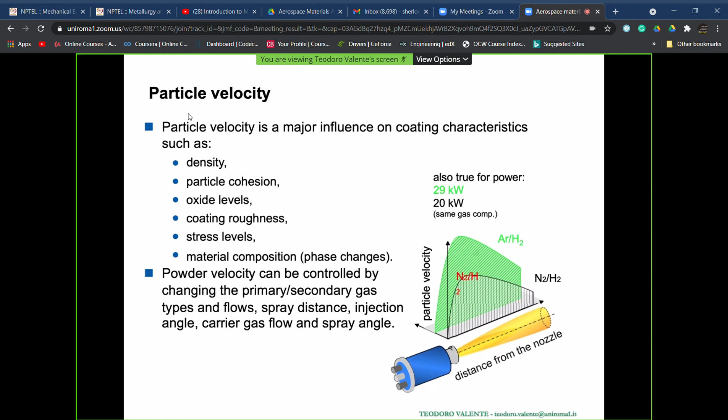The powder velocity can be controlled, as a guideline, by changing the mixture between primary and secondary plasma gas, the flow of this gas, the spray distance, the injection angle, and the carrier gas flow, as well as the spray angle. All these parameters have an influence on the particle velocity.

So to make a small summary of the spray parameter influences on coating qualities: primary gas, and for primary as well as secondary, we are going to identify plasma gases. Primary gas is very important for gas and particle velocity.

If we increase the gas flow, we increase the particle velocity, so we have faster particles, and together this leads to a reduced travel time through the plasma, meaning less heat is seen by the particles. So it must be properly balanced in order to have the desired degree of melting of the particles which are going to be sprayed.

Fast plasma also becomes harder to be penetrated by the particles through the injection mechanisms. And if this happens, it means that fewer particles are injected into the hot area, that is the plume.

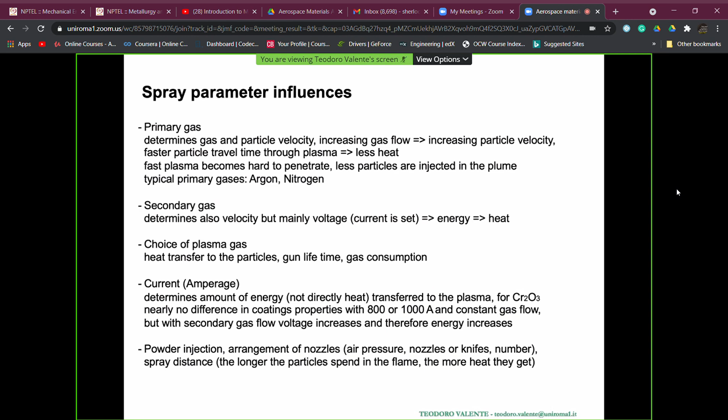As we have already said, the longer the particles spend inside the plume, inside the flame, the more heat they get. So the highest degree of melting can be obtained without exceeding into evaporation phenomena, which can change the coating composition, as it affects low melting elements first.

For the primary gas, nitrogen is the cheapest plasma gas, and it is widely used because it is inert, meaning it is not able to give rise to chemical reactions with most spraying materials.

One material which cannot be sprayed with nitrogen is titanium, because titanium has a high affinity with nitrogen, and after recombination in the plume there could be a reaction between titanium and nitrogen to form nitrides. This means if we want to fabricate titanium-based coatings, the use of nitrogen is not suitable, because we would incorporate nitrides into the coatings, which differ in composition, mechanical properties, and chemical-physical properties with respect to the starting titanium.

But this opens another window. This is one example of the plasma spray technology which has been used, because if we use, for example, titanium with nitrogen, we can expect to have a subclass of plasma spray technology called RPS technique, that is reactive plasma spray. In this case, we want the reaction, and so we want the incorporation of nitrides inside the coatings. If this is desired by the designer, we can think to use nitrogen.

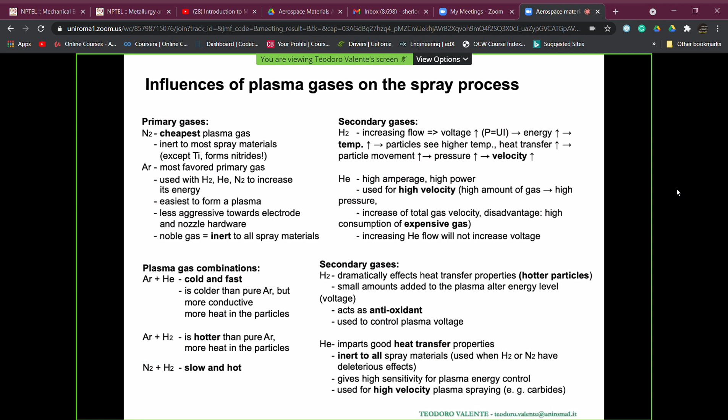The carrier gas flow is important because it can affect the way in which the powder is introduced into the plasma plume. If the carrier gas flow is too low, the powder will not enter the plasma flame, resulting in poor powder melting. If the carrier gas flow is too high, we can have a phenomenon called overshooting.

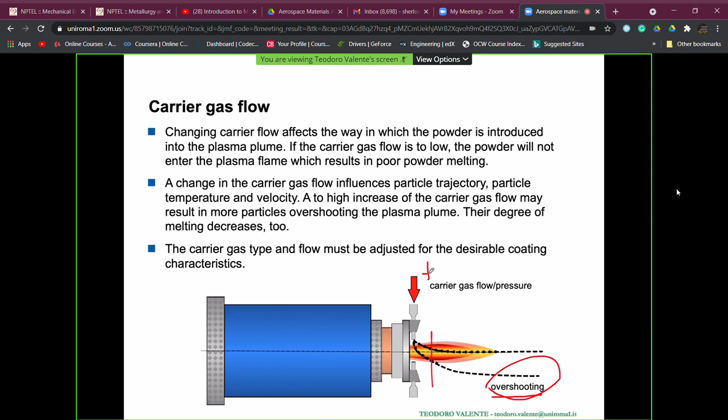That is, particles can travel across without experiencing good melting behavior, giving rise, for example, to unmelted particles incorporated into the coatings, or dust inside the spraying chamber. So this parameter must be set, typically by pre-experimental tests, depending on the substrate to be coated and the material fed as powder, in terms of composition and average size.

If we move to the possibility of having this plasma process in a confined environment, that is, in a chamber like those reported in this slide, we can open two categories of processes. One we have already defined: the so-called vacuum plasma spraying, which can also exist in the variant low pressure plasma spraying or low vacuum plasma spraying, which consists of spraying inside.

You see, this is the robot—this orange part is the robot. At the end of the robot here, the gun is mounted, which performs the VPS or its variant, spraying in near vacuum or under reduced pressure conditions.

In this case, as we have said before, we are going to reduce the frictional force of the atmosphere because we are going to a lower value of pressure, so the plasma plume will be longer. This means also that we can have higher residence times of the particles inside the plume, and we need higher spray distance.

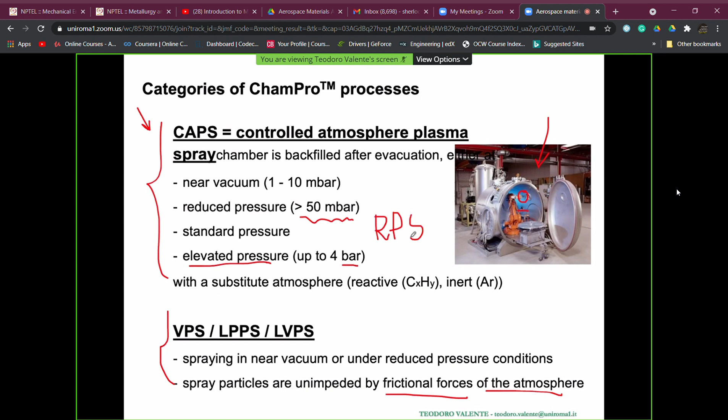The vacuum plasma spray process has some advantages with respect to the standard air plasma spray process, but obviously is more costly because we need a chamber, we need all the pumping unit, we need all the pressure controls. Then we could be limited in terms of size of the component to be coated by the chamber dimensions.

But anyway, one of the most important advantages among those listed here - some are also disadvantages - is the possibility to have a slow coating solidification due to being in vacuum, reduced heat transfer after impact of the particles on the substrate. This is beneficial in order to reduce and better control the residual stresses on the fabricated coatings, which in some cases is the basic mechanism on which, under working conditions, coatings can undergo failure.

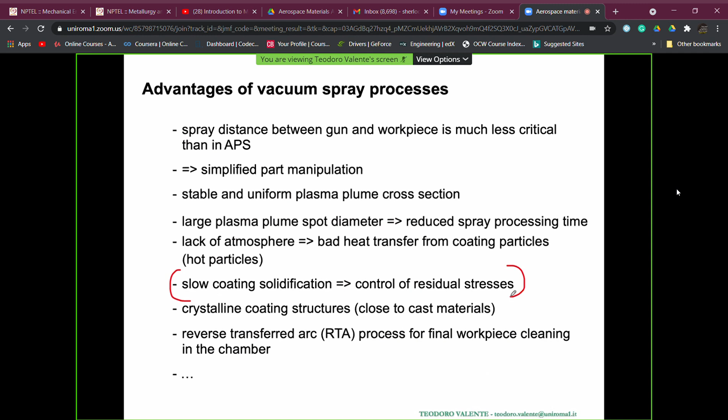Here I have reported just for you, these are industrial slides, some of the configurations which exist for the vacuum spray processes. The only thing I want to say to you is that this type of gun is the Sulzer Metco gun that we have seen at the beginning. So we can have different configurations.

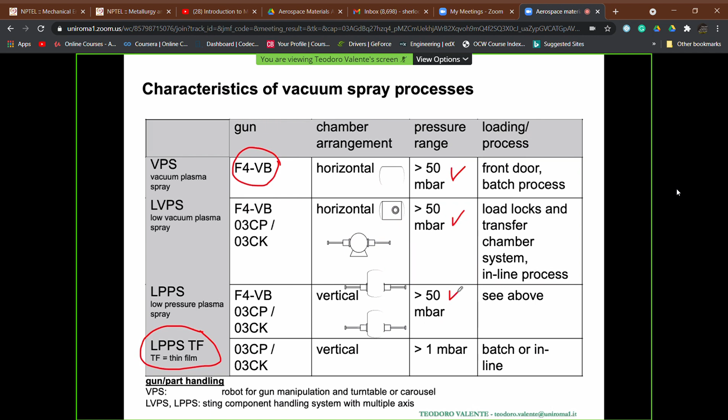But if you see, apart from the last process, which was developed essentially in research and development activities, it has not received real industrial attention for real component fabrication in terms of volume of components which can be considered significant. They are all with a configuration vertical or horizontal and with a pressure range inside the chamber which is near the value of 50 millibar.

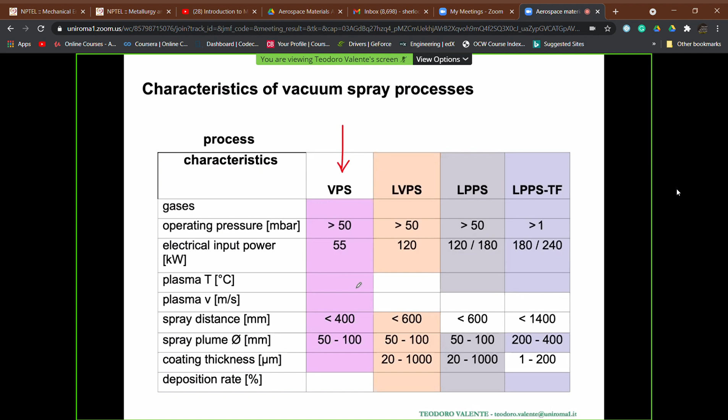We still need to discuss that, but I can anticipate the deposition rates in terms of thickness per unit time for thin films is something around microns per hour. In the case of plasma and vacuum plasma spray processes, we can have deposition rates which are in the range of millimeters for some minutes. So for minutes, I would say, so also the productivity is very different.

Some applications which are, let me say, not related, but just to tell you how these technologies can be used and are used in a widespread area. For household appliances, like this one, you see the powder type which is used is a ceramic one, alumina titania. Here you have the average size of the powders itself, and here you have the most important values of selected processing parameters.

You see here working with a plasma gas mixture, which is argon plus helium. Obviously that's APS, air plasma spraying, because we are spraying oxide materials. Here you see the spray distance, which is around 10 centimeters. These coatings give a specific micro hardness and specific roughness surface properties on the base materials, which could be, for example, steel, in order to have anti-scratching behavior of the appliance itself.

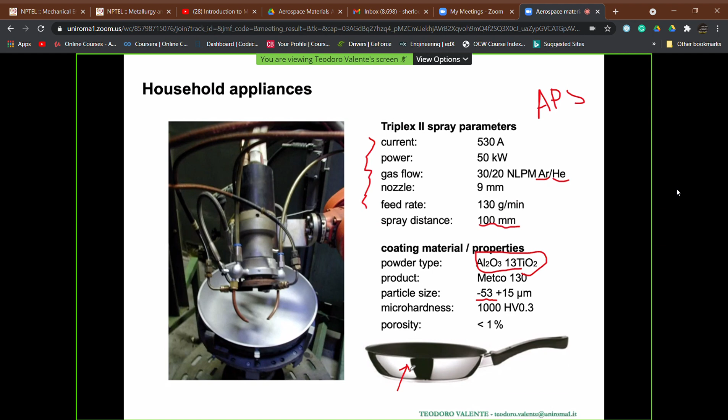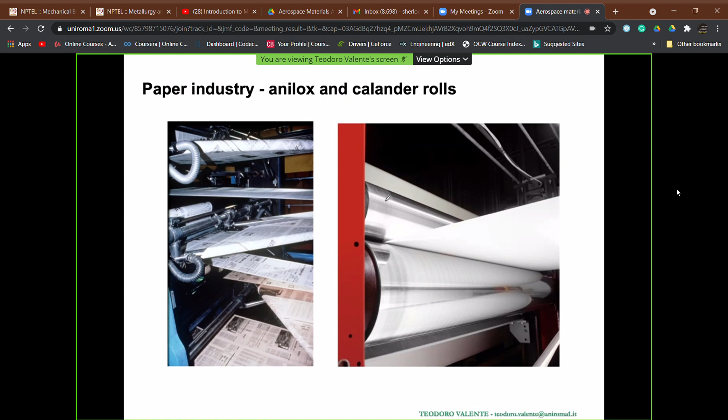Another sector I mentioned in which plasma spraying is used is in the paper industry, on calender rolls, due to the high wear loads that paper is able to put onto the surface with which it comes in contact during the fabrication.

Also for the transfer of ink to printing rolls, there's the possibility to have coatings which are laser engraved, like this one, in which ink can be retained into the special morphology of the coating itself. This is important, as well as the possibility to have wear-resistant surfaces.

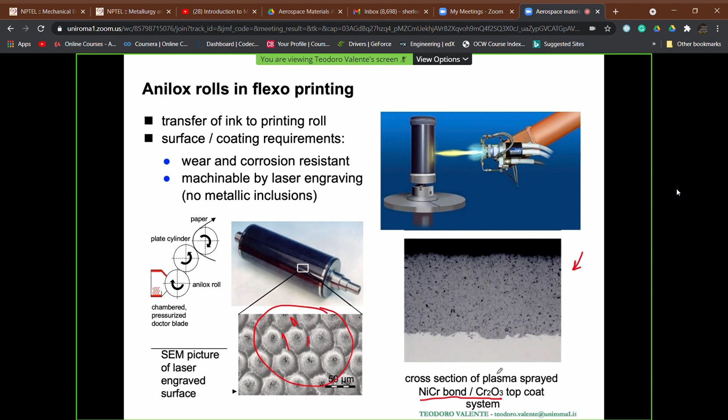That's an example of a coating. In this case, it's a cermet coating in which we have a metallic phase based on nickel and chromium, and a ceramic phase which is not a non-oxide ceramic phase like in standard cermet materials, but is chromium oxide.

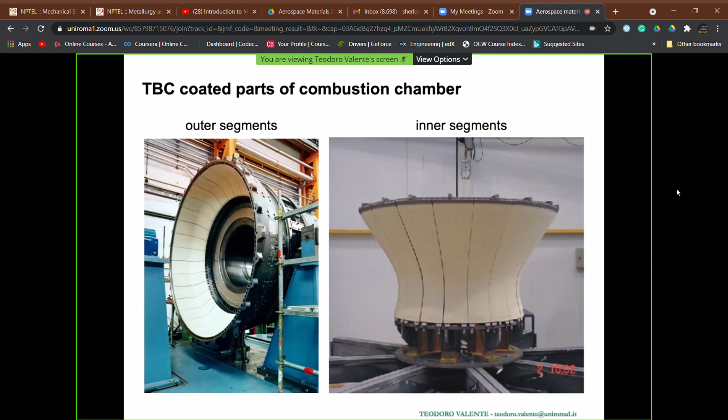And then coatings in gas turbines. We have seen also these pictures, just to remember: combustion chamber, blades. That's an important area of application referring to our field of this kind of technology.

Let's move a little bit now to the most important process, as we defined last time, that we can meet in combustion-based thermal spray technologies, which is named HVOF, that is high velocity oxygen fuel flame spray. So, what is the basic configuration?

In this case, we also have, as in the case of plasma spray, a gun that, depending on the type of technology used, can be a little bit longer than the torch - this is the real name of the gun for plasma spray technology. It has a combustion chamber inside the gun, since the energy is given by combustion. So we need to use a fuel, and then the combustion, in order to achieve the highest possible temperature, is given by using not air but oxygen.

Then, in the most common configuration, we have, differently with respect to plasma spray technology, an axial injection of powders inside the gun. Obviously, also in this case we have a gas which transports the powders inside the gun, and so we have the interaction between the powders and the high temperature area due to combustion. Then we have a barrel exit which, depending on gas and particle velocity, usually produces a supersonic stream. It has a converging-diverging section in order to increase velocity after the combustion step.

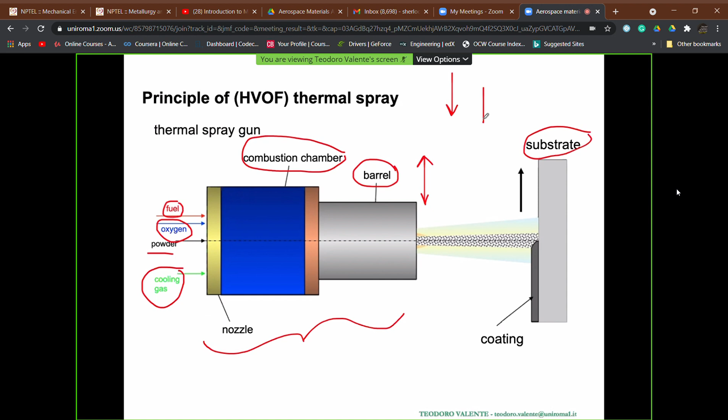This process, the HVOF, is a process which is carried out only in air. So one thing we should discuss a little is that if we are going to spray metallic-based materials, we could expect, in principle, due to the fact that we have air surrounding our flame, our plume, some kind of oxidation.

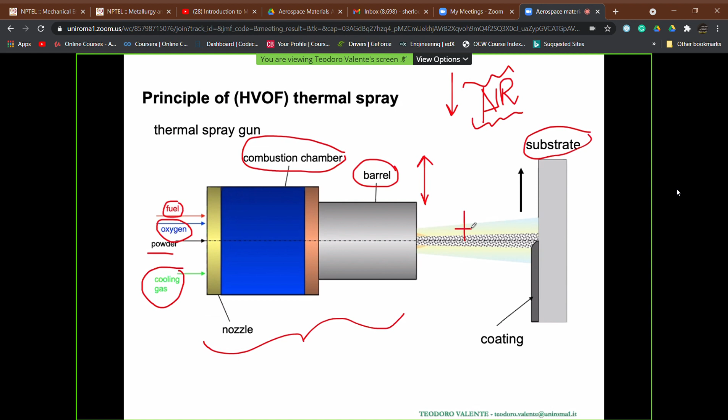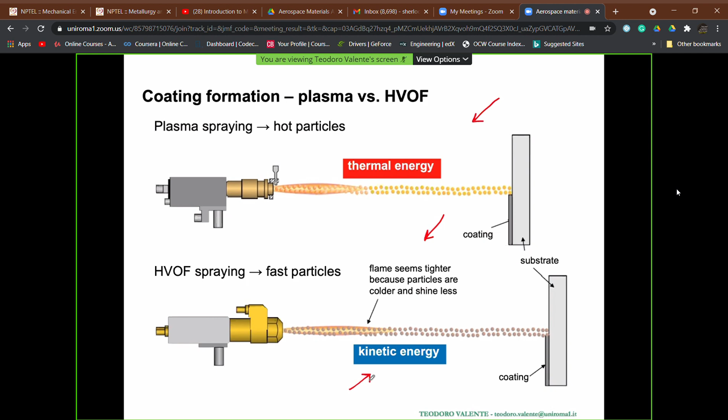But we will see that this can be very much minimized for reasons we will discuss in a moment. Remember, if we want to compare plasma with HVOF, we said that plasma, due to the high temperature processes, is essentially, in all variants, controlled by thermal energy. Instead, HVOF processes are controlled by kinetic energy, due to the very high particle velocity and gas velocity values that we can experience.

We set this number in terms of particle velocities: maximum values can reach around 800 meters per second. For what concerns the flame velocity, we can experience values, corresponding obviously to the maximum particle velocity, which are higher than 2000 meters per second. So it's a very fast process. The maximum flame temperature, depending on the fuel used, is around 3200 Celsius, even though usually it is a little bit lower than 3000 Celsius, but not so much.

And so again, remember that this process is not the most suitable to fabricate coatings starting from high melting point materials, like, for example, ceramic materials, oxide-based ceramic materials, because the melting degree obtained is not sufficient.

Some examples of coatings made by ceramic materials using HVOF have been done, but in this case we need very strict control on the average size of the particles, which must be of the order of 10-15 micrometers, with respect to the standard for HVOF, which is around 20-25, sometimes 30. By reducing the diameter of the particles, we could expect - and this has been proved, though the most used technology in this case is plasma - a sufficient degree of melting of the particles.

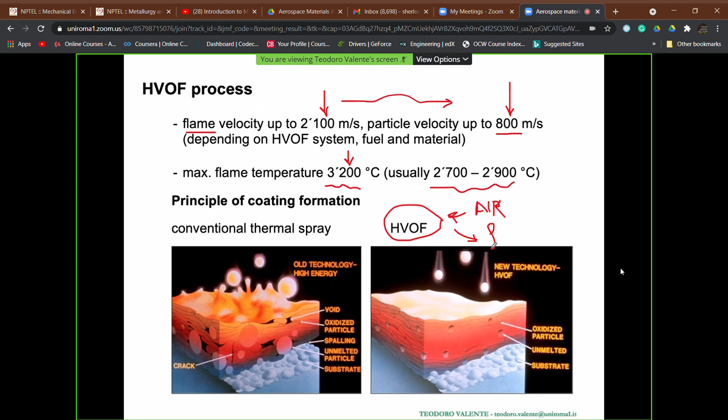The advantage with respect to plasma spraying when we can use HVOF, let me put it on two lines. First, we do not need to use this process in a confined environment, so HVOF is always performed in air. Second, the highest velocities of the particles can lead to very low values of porosity inside the coatings, with mass density which can approach 99% of the theoretical density of the materials, compared to when fabricated with another technology.

Which are the materials which are possible and which are those most used? You see here I have mentioned alumina, but just as experiments - typically these are materials having not very high melting temperature. So pure metals, for example, or metal alloys, or self-fluxing alloys, which are again metal alloys, MCrAlY, which we have discussed because it is the bond coat of the thermal barrier coatings, and cermets.

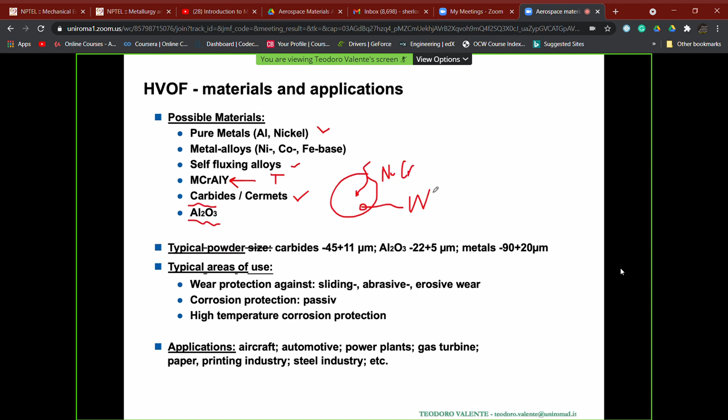But having as a reinforcing ceramic phase not an oxide, but a non-oxide ceramic, typically carbides. In this case, as we have said but need to repeat, if we have our particles made with, let me say, a matrix based for example on a metallic alloy like nickel-chromium, just to give an example, and another small ceramic phase, which are for example tungsten carbide - so we start from pre-alloyed particles, which can also be fabricated by gas atomization, by mechanical milling, with the methods that we have discussed when we discussed sintering technology for ceramic materials.

In this case, we are not going to expect to experience any melting of the carbide, the ceramic phase, in the cermet materials. What is going to be melted is the metallic phase. Thus, the mechanism by which we can experience the splat and then form the coating is related to the presence of a melted phase, which is only the metallic phase.

The area of use of this kind of technology is essentially to fabricate hard coatings, that is wear resistant coatings, or corrosion protection coatings. I mentioned also high temperature corrosion protection, because this is expected as one of the functions of a bond coat in thermal barrier coatings.

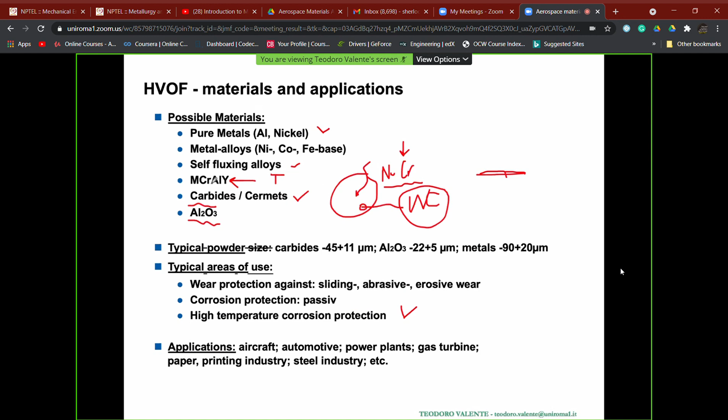The application of this kind of technology is also very wide, because it can be used, and is used, in the aircraft area, but also automotive, power plants, gas turbines, paper printing industries, steel industries, etc. Some examples of application of these coatings made by this technology in the aircraft area: we can have functionalization of mid-span dampers, or bushing flange outers, and exhaust flaps.

You see here, we have cermet materials in which the ceramic phase is carbide-based, not tungsten carbide but chromium carbide. Compressor seal rings, in this case, we do have tungsten carbide in a cobalt matrix, etc., as reported here. Apart from this, it must again be mentioned: the MCrAlY coatings, which act as bond coat in thermal barrier coatings.

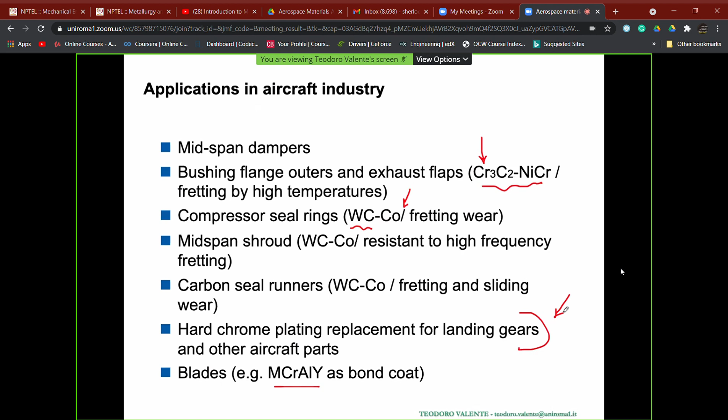We have also this area, which is very important and interesting, for which we will have some dedicated slides, but let me anticipate the possibility of using this kind of technology with proper coatings in order to replace hard chrome plating - a technology very simple, very easy, but very dangerous for the safety of the operators. For example, for surface functionalization on landing gears or other aircraft parts. So, this is what we have said.

In some cases, we can use HVOF also in order to fabricate coatings with proper electrical conductivity. In this case, we are not going to use the powders that we have mentioned before. We are going to use copper, but we need to assure very, very low oxygen content in the coatings, otherwise the electrical conductivity of the coating itself will fall significantly.

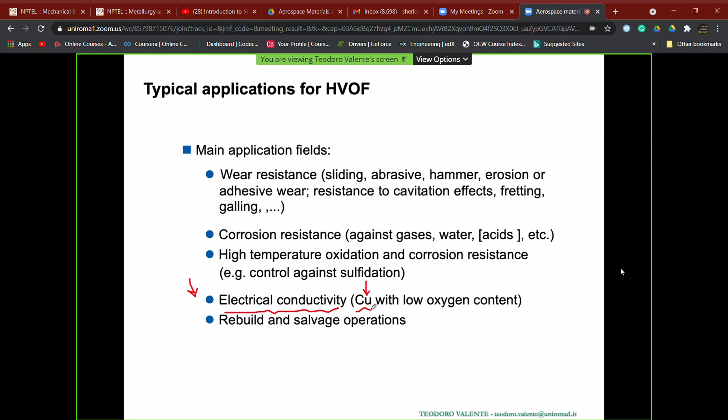Here you have a list of the most common materials. Then I will leave to you also a table, more detailed, but just to resume, the most common and most typical materials used for HVOF.

So carbides, the tungsten carbide in a cobalt matrix, or in cobalt chromium matrix, or chromium carbide in a nickel chromium matrix. Pure metals for corrosion protection, like aluminum, copper, for the reasons I just mentioned, or steel, again for corrosion protection, or cobalt-based materials like stellites and Tribaloy. These are metallic alloys, very hard on the surface. Nickel-based materials also, like Inconel, can be made by HVOF, as well as MCrAlY, and some very few cases of ceramic like alumina, as I told you before.

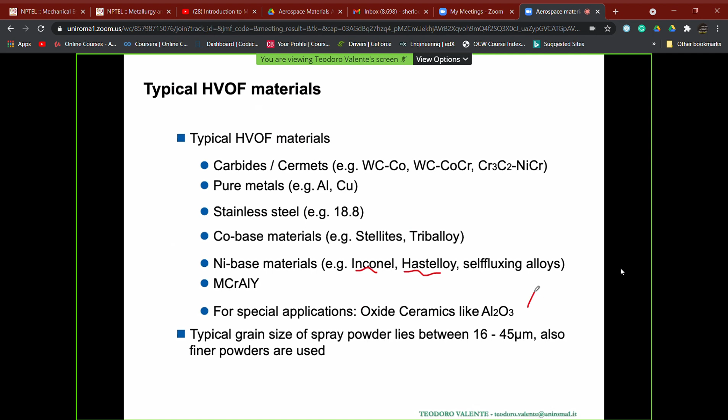All the peculiarities of the HVOF technologies, if we compare to flame, let's say flame, which is another combustion-based process, very poor in terms of technology, but if you compare with plasma, the most important benefit which can be obtained is the very high bonding between coatings and substrate.

We can experience this due to the high velocities and the possibility to have the barrel at the exit of the torch, like we have seen in the previous scheme, thus reducing the amount of possible reaction with oxygen, and the possibility to also have, in some cases depending on the fuel, a reducing environment inside the flame. So we have low oxide metallic coatings.

That means the quantity of oxides which can be retained in the coatings is very low, due to reaction between powders and the atmosphere. Due to high velocity, we have a very high value of cohesion resistance of the coatings itself, very low porosity, and this gives us also the possibility to have suitable values of micro hardness and lower roughness of the surface as sprayed. The possibility to retain also very good machining capability of the coating is linked to the fact that most of the time we are going to spray not ceramic materials, but metallic base alloys.

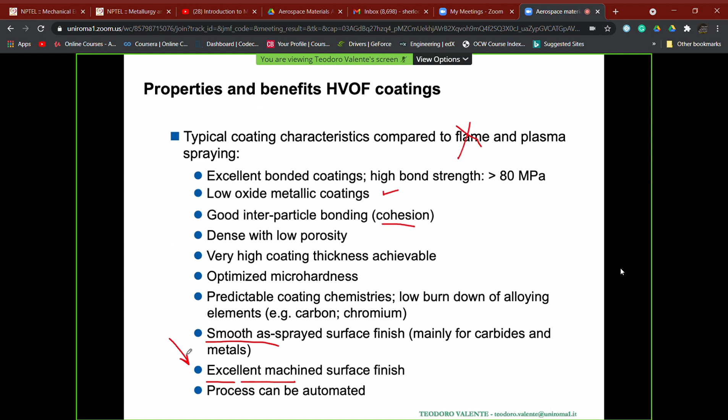The problem of oxygen content is very important for the MCrAlY coatings, which are fabricated by HVOF, and the possibility to reduce the oxidation when we make this process in air is linked to what we just said: the high velocity of the particles, the short dwell time, because we have high kinetic energy, so less time traveling from the exit of the barrel to the surface of the substrate.

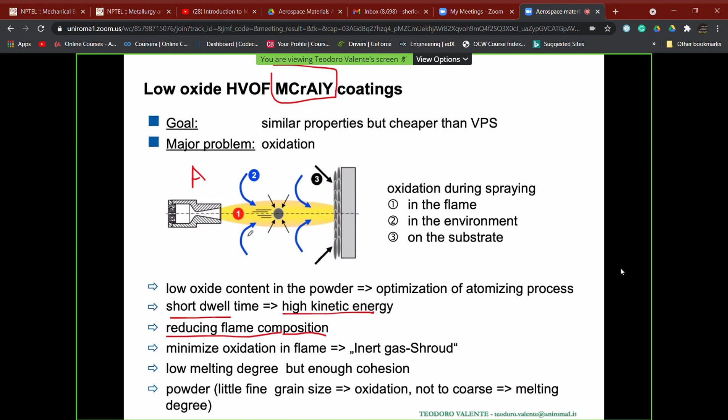But there's also the possibility to have a flame composition which is reducing in terms of the possible chemical reactions, and also the possibility to adopt some tricks like the shrouding of the flame by using a longer barrel. Shrouding means that the interactions happen inside the barrel where the oxygen is essentially not present.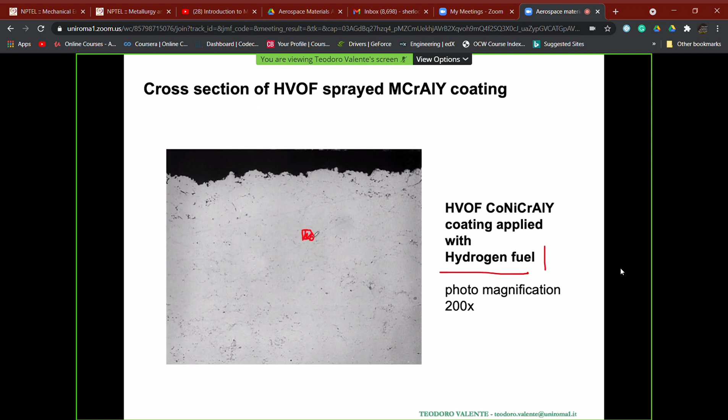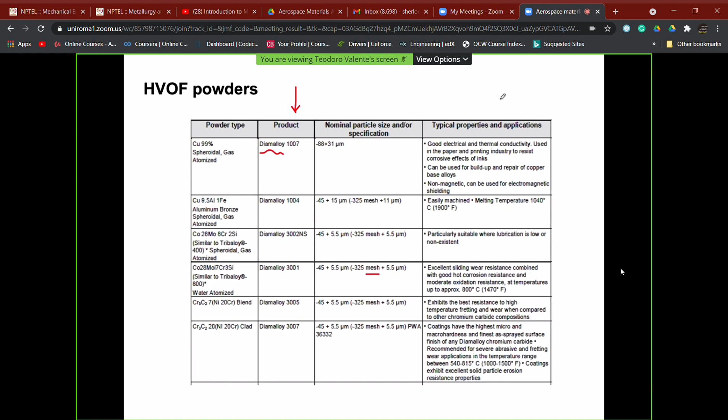Here, just for you, I have reported quite a long list, so obviously it's not necessary to know it all. It's just a reference if you need something: the most common powders which are used, commercially speaking, and commercially available for HVOF, that's the commercial name. For example, the first one, with information related to the mesh size, which is what we have already discussed regarding sintering for ceramic materials, along with typical properties and applications. There are quite many that are commercially available, but the most common are those we have summarized before.

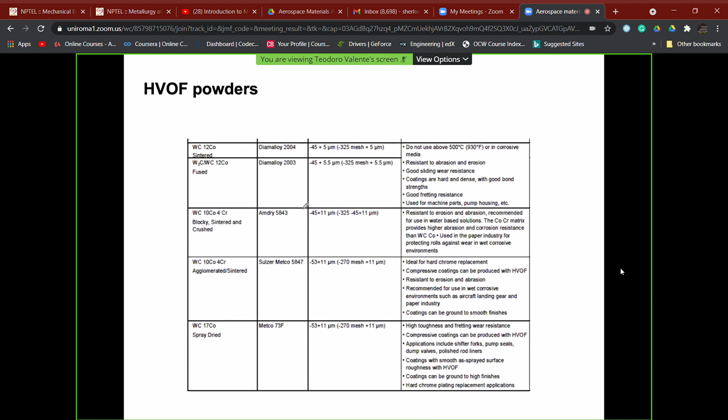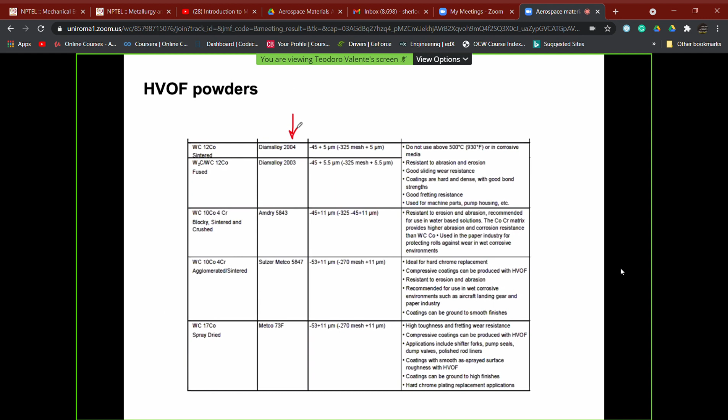That's another producer, the same producer of the plasma torch, which also makes powders. There are many producers in the world; these are the most known and most widely diffused. They have a commercial name which never tells us about the material composition, so we need to check the producer's catalog if we want to fully understand the composition of a certain named powder for HVOF.

Again, that's another part of the table, so you can find all this information easily if you read somewhere that this is an HVOF coating made with Diamalloy 2004 powders.

So look at the table and you have an idea of what the powders are, which is the composition, and which is the purpose for which those powders and coatings have been used. These are the list of the fuel gases that can be used or can be found for HVOF.

Let me say that generally speaking, each gun is able to work essentially with one type of fuel. So you can have different guns. The process is again HVOF, and it's always HVOF independently of the fuel which is used.

So we have the possibility to use hydrogen. We have techniques in which the fuel is methane, ethylene, propane or propylene. This one, the hydrogen-based HVOF system, is the most performing, able to give us the highest value of flame temperature, and able to establish inside the flame, as we said, a reducing environment, thus minimizing eventual oxidation problems for the powders which are fed into the flame itself.

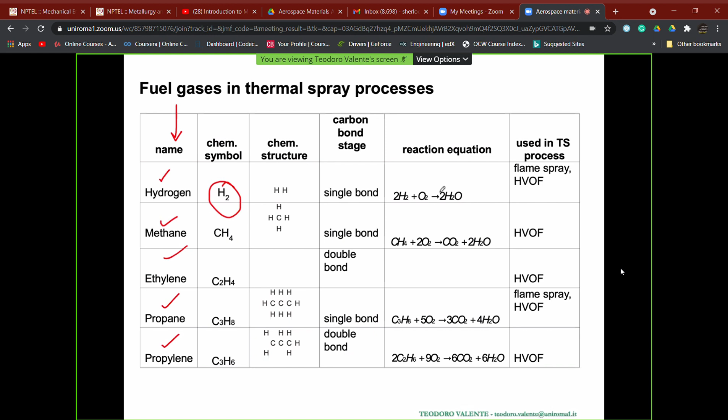We are working with hydrogen, which is a very dangerous gas in this case. So the systems and plants must have all the security tricks and security levels, but this is an engineering problem. It can be easily done, and it is done. Thus this technology is diffused for the fabrication of coatings.

Some applications of HVOF, I was mentioning before, the hard chrome replacement. What does it mean? Well, electroplated hard chrome, also mentioned as EHC, is the standard process to put on one metallic surface, for example, chromium-based coatings, which is very hard and very wear resistant.

And the standard procedure involves an electrolytic process from which the deposition of chromium, metallic chromium, onto the surface, onto the substrate, can be obtained by a reducing mechanism which is forced inside this electrolytic bath, in which we have chromium ions, typically hexavalent, which are in the bath, and to which we give electrons, thus having a reducing reaction till the formation of metallic chromium, CR0, which is deposited onto the workpiece, that is, onto the substrate.

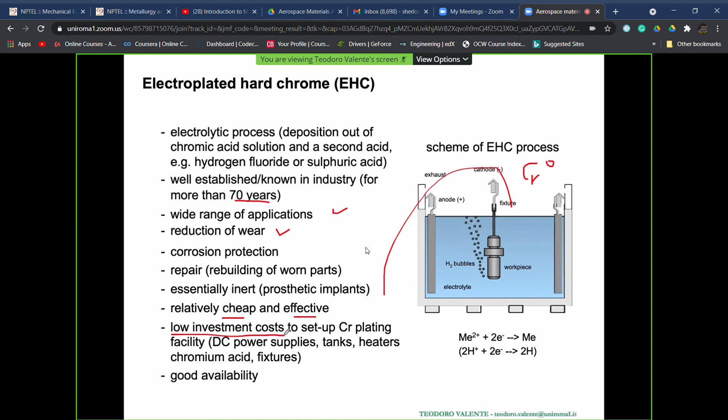This system has a wide range of application, is very well known, used in many industrial fields for more than 70 years. It is able to give us very hard coatings, reducing wear, and in some cases also giving corrosion protection. It is cheap and effective, and the system itself requires low investment cost compared, for example, with HVOF. So this has been, and sometimes still is, the standard solution for fabrication of highly resistant coatings for wear problems.

It is used not only in the industrial area for the purpose we have just mentioned, because the electrolytic process is also used to fabricate decorative coatings. In this case we have very thin coatings, about 2 microns in thickness, even though for our interest we are here in the so-called technical hard chrome plating, in which the thickness is as high as 100 micrometers. You see the typical substrate materials which can be treated with this EHC technology, and it also has a very good deposition rate.

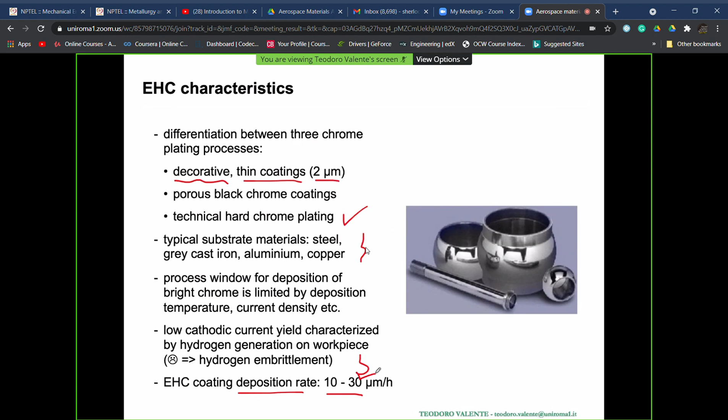We can have, in an hour, the fabrication of coatings with thickness ranging from 10 to 30 microns. Some other features characterize the hard chromium electrolyte based process: the appearance, the morphology, the color of the surface thus treated is silver. You see here the value of hardness is very high, reaching 1100 Vickers. Remember that silicon oxide, silica, has a maximum value of 1200 Vickers, and this leads also to very high wear resistance together with abrasion resistance.

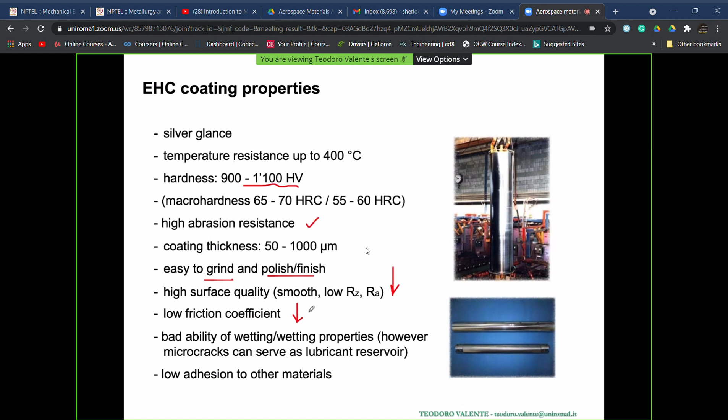Then these kinds of coatings, being essentially metallic, are very easy to grind, to polish, to finish, and can give very low final roughness after mechanical treatment, thus reducing the friction coefficient and giving a hard coating onto the surface, reducing power loss from friction and increasing the lifetime of the treated component, because the damage induced by wear is reduced.

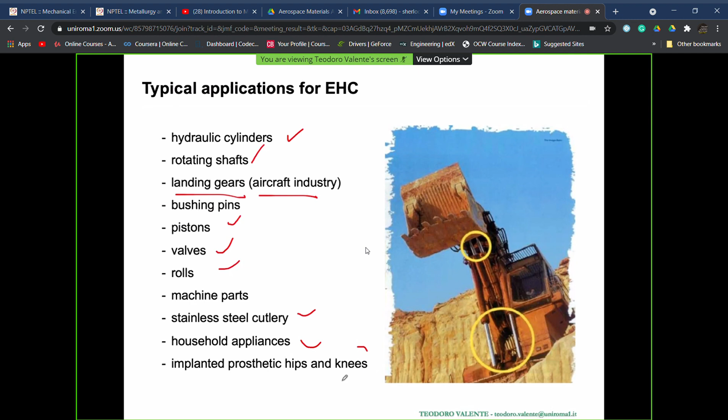Some typical applications, you have seen it also on the way: hydraulic cylinders, rotating shafts, landing gears in the aircraft industry, pistons, valves, rolls, stainless steel cutlery, household appliances essentially for decorative purposes, and some cases of applications also in the biomedical area.

But which is the problem of this very cheap, very simple, highly effective technology? The problem lies in the use of hexavalent chromium inside the bath of the electrolytic process. And you see here the problems for the safety and health of the operators which this hexavalent chromium can cause. This is already a well-known state-of-the-art effect.

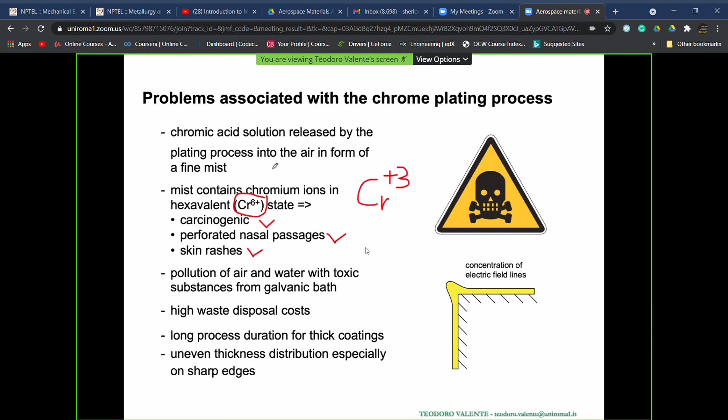And so the need to develop or use coatings different from the standard hard chromium technology based on hexavalent chromium has started. There were some experiments based on the same principles, but using trivalent chromium instead of hexavalent chromium, but the properties of the coatings fabricated in this way were not comparable to those obtained using hexavalent chromium. One solution to replace chromium plating based on hexavalent chromium is to refer to the use of HVOF coatings.

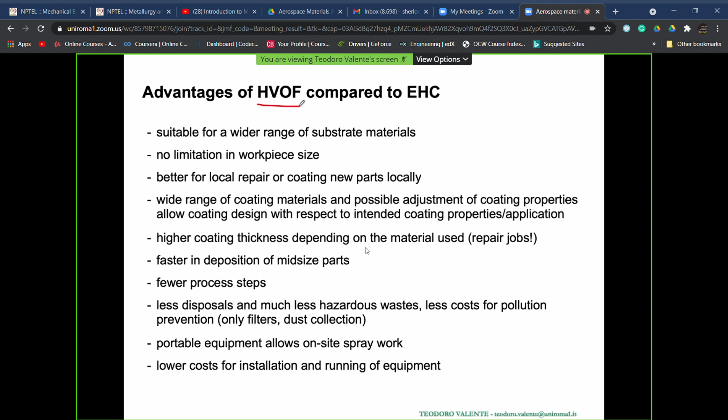For HVOF coatings, we need to select a powder which is able to give comparable properties of the thermal spray coatings with those obtained by the electrolytic process. The work started, and the aircraft industry was the pioneer in this field, knowing the advantages as well as the limitations of HVOF. The solution identified was the use of cermet coatings, and one of the most important solutions is the first one or the second one.

You see here the values of hardness which can be reached, for example, with this kind of material, which is at least 80% in weight ceramic phase, the rest 20% in weight metallic phase. But this is sufficient to have a suitable splat during coating fabrication.

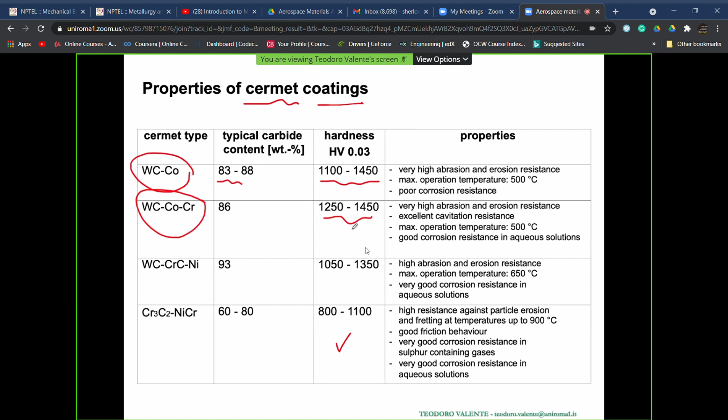If we look at the hardness values, we are able to reach, apart from the last one which is not used for this purpose, comparable values, sometimes also higher than those obtained with hard chromium based on hexavalent chromium. Here you have a table to resume one solution, and the other solutions are chrome plating and HVOF. This is a typical gun which is based on the use of hydrogen as fuel.

For what concerns the hardness, we can reach values which are higher than those of chrome plating. For macro hardness as well, we can have values higher than hard chrome plating. In terms of porosity, we do not have many differences. In terms of bond strength of the coating with the substrate, we have values which are more or less similar. One thing that makes the difference, and this was one of the elements for which the powder composition was selected, is the corrosion resistance properties.

We can have, in terms of fatigue behavior, better properties expected from HVOF with respect to the hard chromium replacement. Well, that's other information, let's go on.

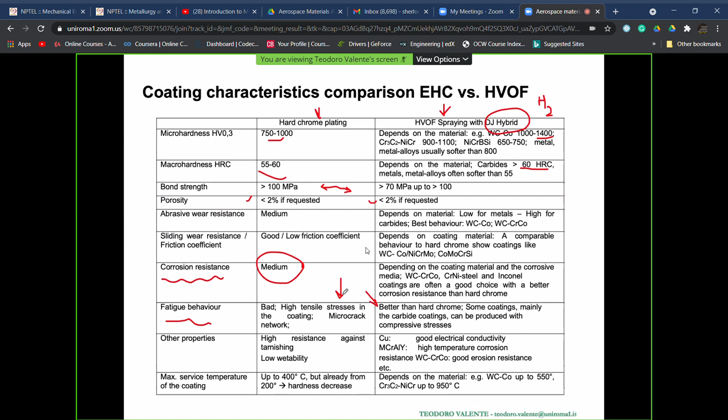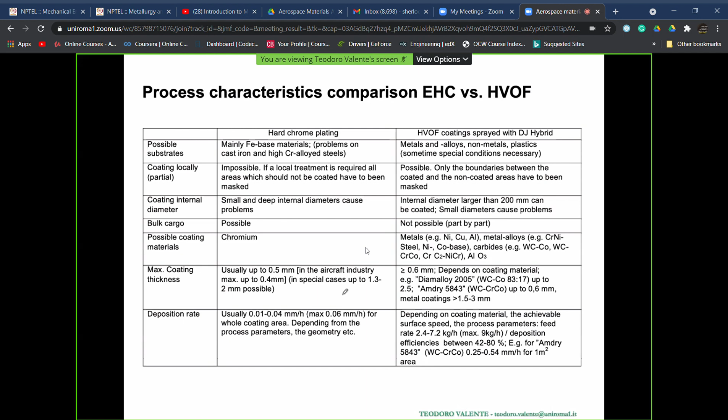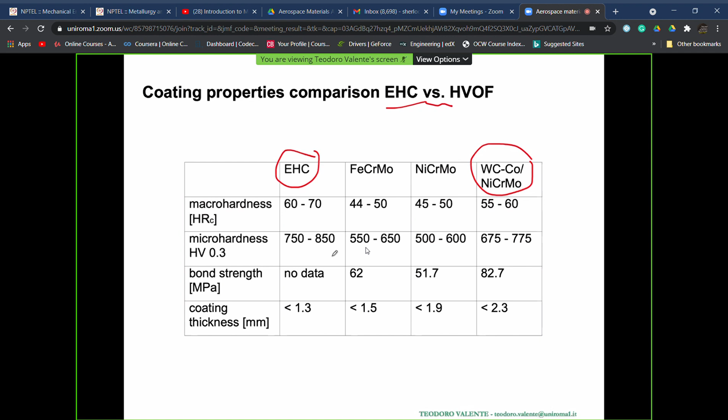You see here another table of comparisons of properties obtained by chromium plating and cermet, in which we have tungsten carbide, cobalt, but also another metallic phase, which is nickel chromium. By comparing, we can achieve the same properties and sometimes also higher values than chromium plating.

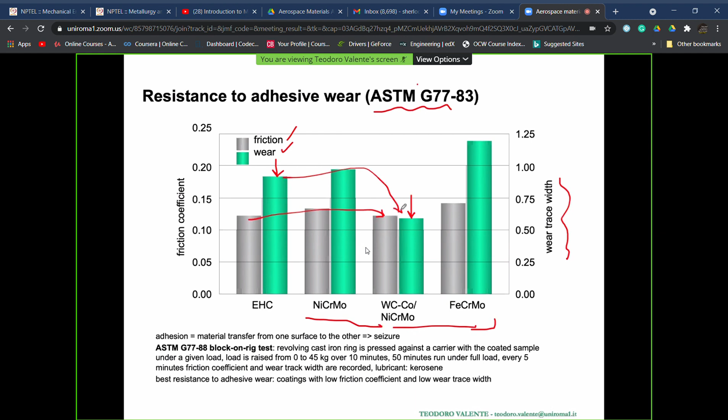When the wear traces decrease, the wear resistance coefficient values increase, meaning a longer lifetime of the coatings, as well as in terms of corrosion resistance. One very common way to test corrosion resistance for the aircraft industry is to refer to standard procedures based on the so-called salt spray test. In this case, we put salt on the surface.

This is usually sodium chloride. Why sodium chloride? Because we have sodium chloride in the seawater, and most aircraft are flying near the seawater, or they have the hangar near it. Think, for example, of the Rome airport, Fiumicino, near the seawater.

If we have a look at the figures given by this salt spray test procedure, in terms of survival of coatings in hours inside the chamber where the salt is sprayed: this is hard chromium, this is standard tungsten carbide cobalt made by HVOF, this is nickel chromium carbide made by HVOF, and this is the solution of HVOF spraying tungsten carbide, cobalt, and chromium.

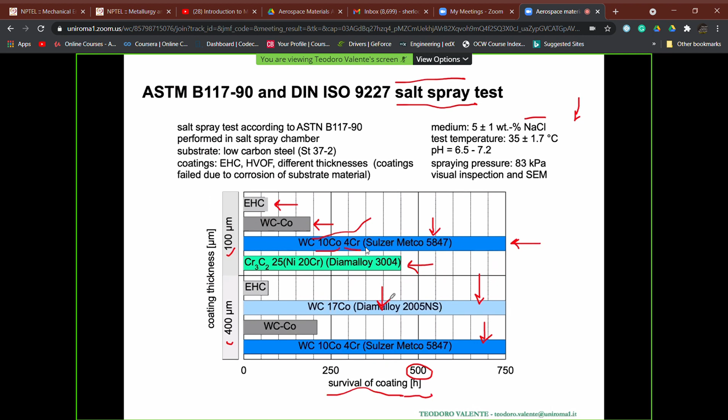The message is that better performance can for sure be reached, but not for all material compositions which can be used for HVOF. This work was done some years ago, and so we already have the final testing qualification, and so we know what we can select, what we must select in order to have the best results.

And thus, landing gears can be coated in this area. You see, these are HVOF coatings, applied by using solutions which have been identified. Obviously, there is some resistance from the industry side to move to this kind of solution, including the aircraft industries.

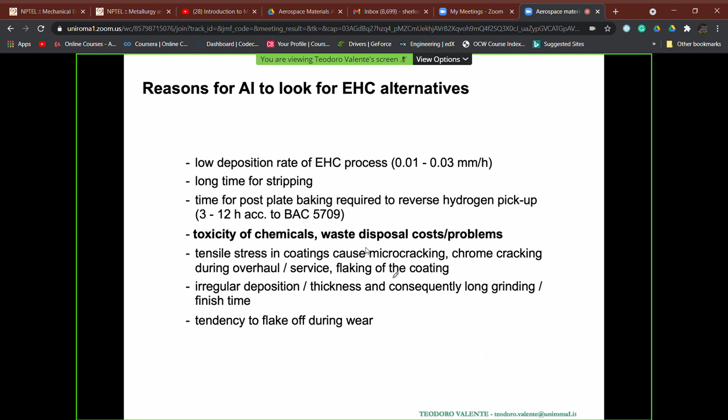Other examples of parts which have been coated: this is a 757 main landing gear by HVOF. You see the silver appearance here of the parts which have been coated. This is due to the roughness of the thermally sprayed coatings after fabrication, so we need, and this has been done, to make the coatings, and then we also need to machine the surface in order to reduce roughness and also the silver appearance.

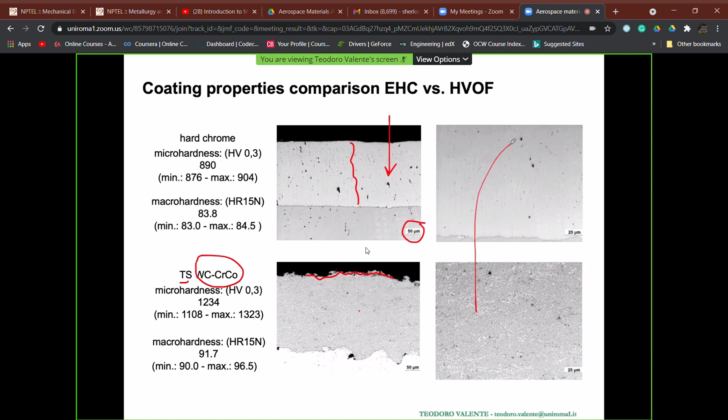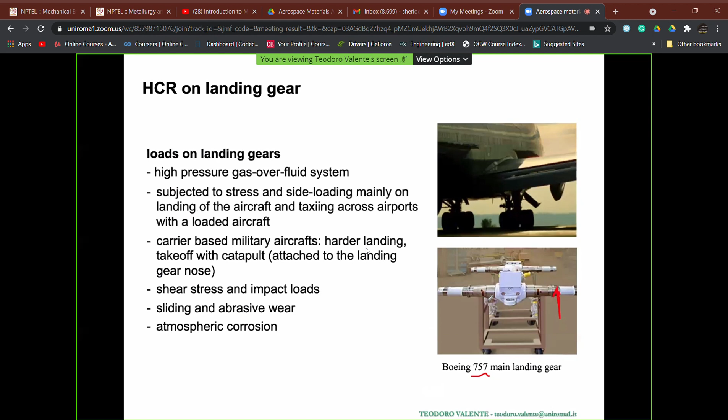The importance of HVOF in this case is also related to the fact that HVOF, as we said before, is a process driven by kinetic energy. Have a look at this microstructure: the coatings which can be fabricated are very dense, comparable to those obtained by standard hard chromium solution. So this is one field of application of HVOF related to the aircraft industries, which is very important for us.

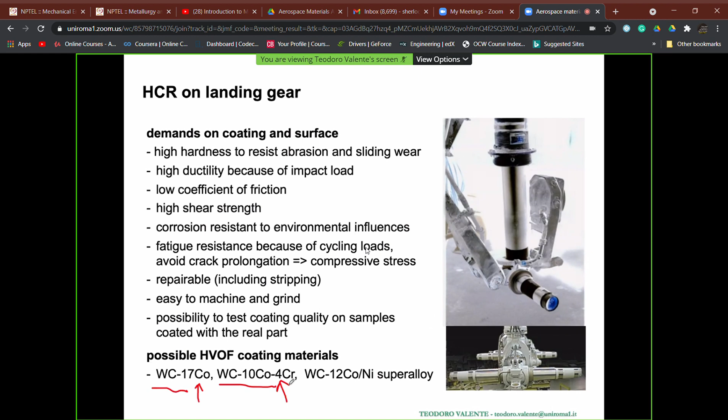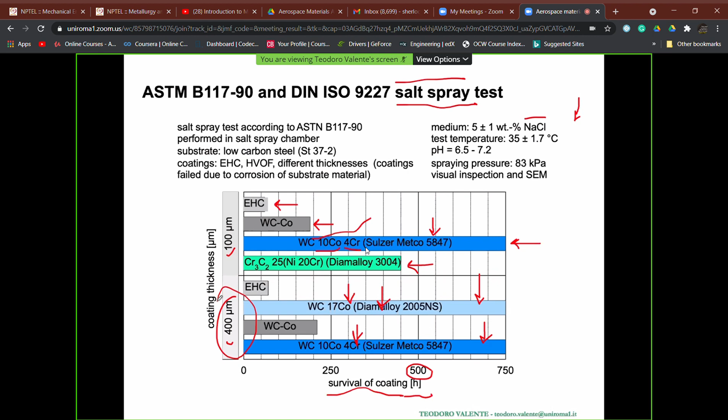Another example: the materials considered for use are those I've shown you. They have the best performance, for example for corrosion resistance, being tungsten carbide 17 cobalt, or tungsten carbide 10 cobalt 4 chromium, which are, as we have seen, the best performing fabricated coatings to contrast corrosion due to the presence of salt in the environment, evaluated on a lab scale with a salt spray test.

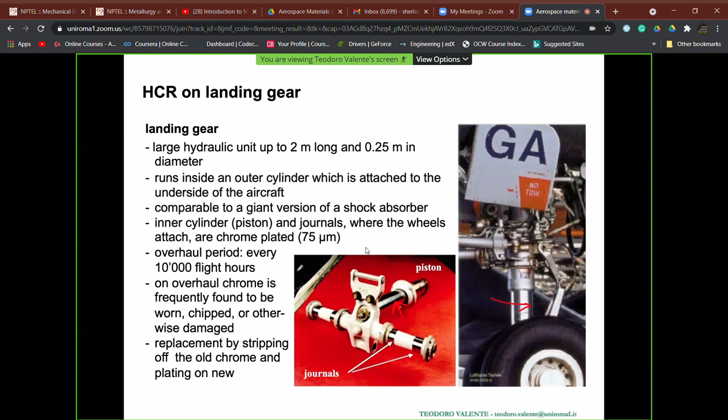Another area in which thermal spraying is very important, and with this we will finish today's lesson, is the possibility, as we anticipated, to fabricate a special class of coatings named abradable coatings. This relates to a problem we have discussed qualitatively.

Let's consider a turbine blade. We know that during operation the turbine blade will undergo creep deformation, and we remember that creep deformation is a permanent, unrecoverable deformation. So if we put our attention on the casing and the top of the blade, we need to leave a gap between the end of the blade and the case, just to allow the creep deformation to happen.

Without having failure due to the impact of the blade on the fixed part on the casing, since we are able to evaluate with time, at least for the stationary part of the creep, how high the plastic and unrecovered deformation due to creep will be, the width of the gap between the tip of the blade and the casing segment can be directly related to the lifetime expected in terms of maximum hours of operation.

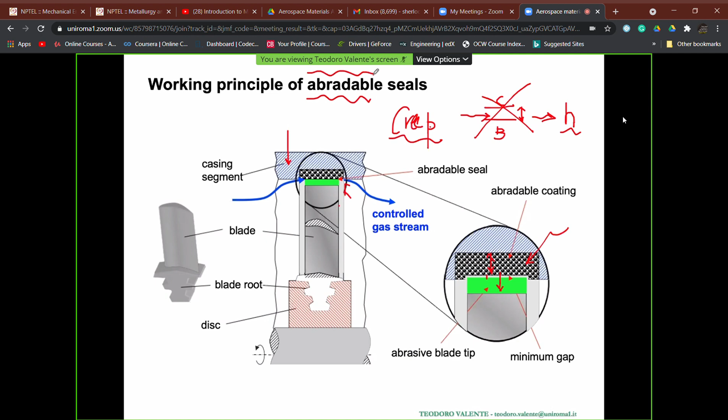And so these coatings must have a special composition, because they must withstand, depending on the section of the turbine, the temperatures of the gas phase, but they must also be easily abraded, and this is the reason for abradable coatings, in order to let the rotation of the blade happen without any problem.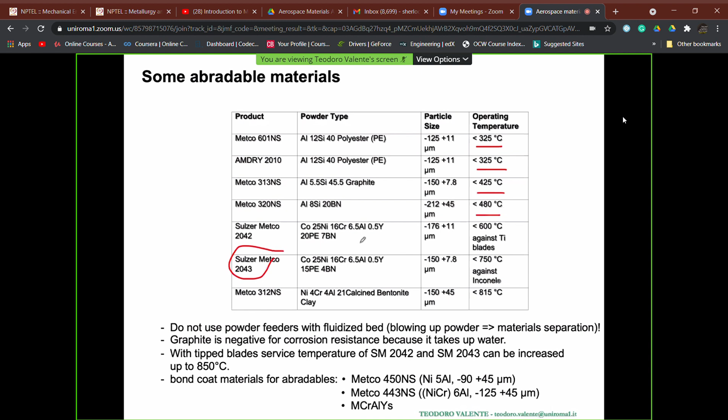And what is going to be used? Let's go see directly, on this slide. Depending on the operating temperature, at different stages of the turbine, we have, again by commercial number, coating compositions, for example a metallic phase of cobalt, nickel, chromium, aluminum, yttria.

In some cases also a plastic material, polymer-based materials, and ceramic materials, like this one, which is the most known, boron nitride, which acts as a self-lubricating material, thus allowing the exfoliation of the abradable coatings, the consumption of the abradable coatings during the working life and exercise of our blade.

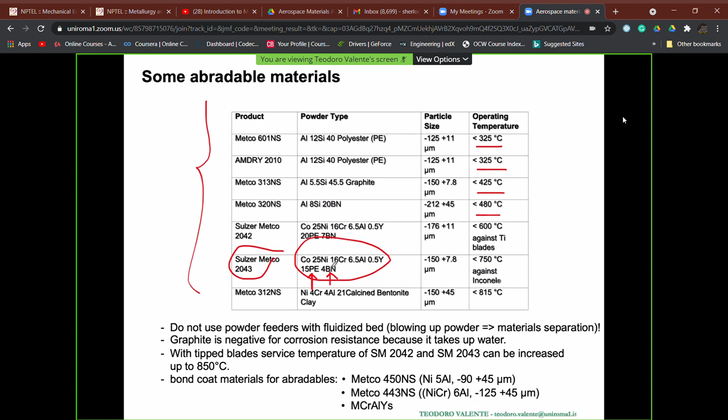This kind of coating, in which we can have ceramic phases, is usually made by plasma. This is one example of an abradable coating, and you see all the black parts, which are the mixture of the polymer-based materials and the ceramic materials. So the spraying and fabrication of abradable coatings for high-performing engines is the standard solution, and this is another field in which plasma spray technology is widely used.

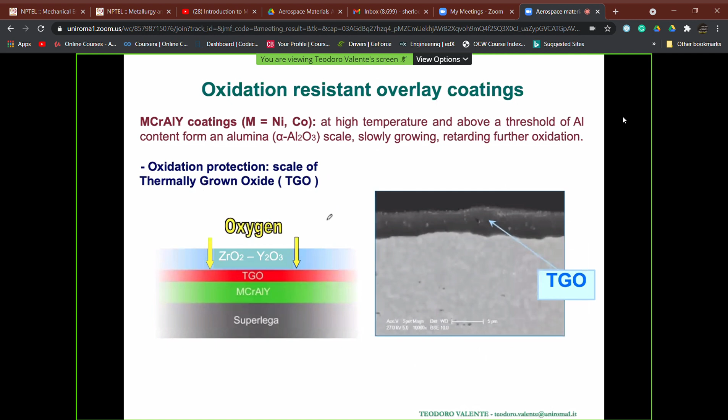And so we are again inside the area of our engines in our aircraft. For what concerns the engines, you will find—I will not discuss this in the slides, I have already put them on your Google Drive—again some consideration on thermal barrier coatings. We have discussed this many times; this is a small refinement just for your curiosity. All this was already defined when we discussed TBC; some other pictures are for you, just for your curiosity.

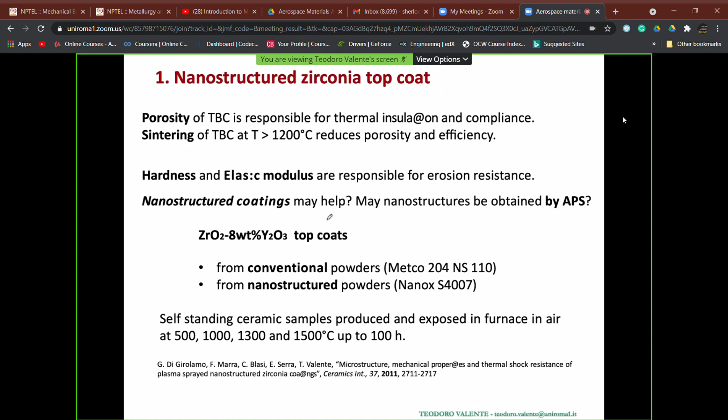But what we had to discuss about thermal barrier coatings was already done when we discussed this argument. Here you also have some examples of nanostructure; that's the same picture of thermal barrier coatings.

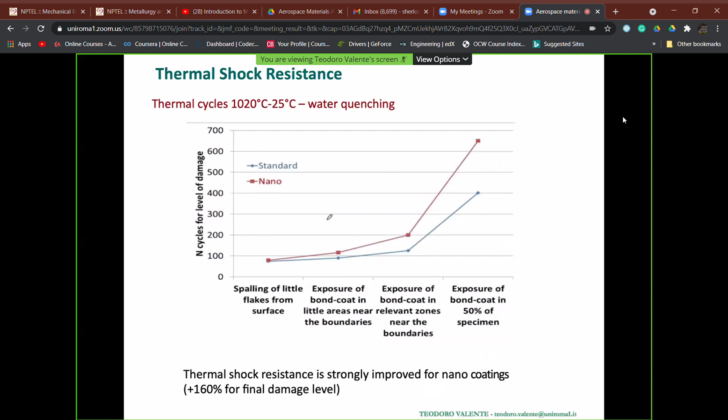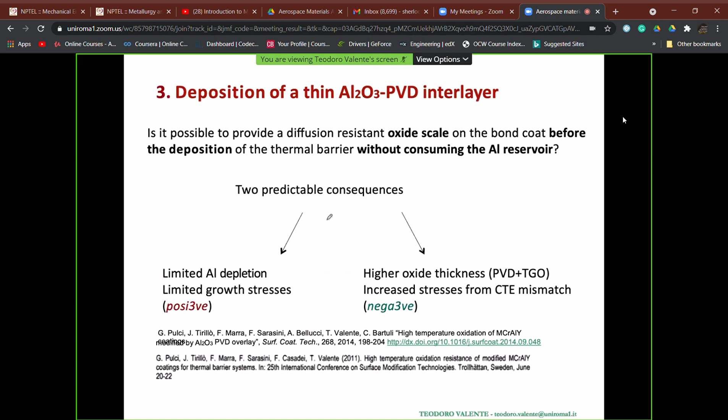So for what concerns our discussion on surface engineering technology, with the abradable coatings we have finished the area of thick coatings based on plasma and HVOF, and we need to discuss another important area, which is thin film coatings based on vapor deposition methods. We will start from here, from this topic, next Friday. And for today, it's all. So if there are questions, I'm able to answer.